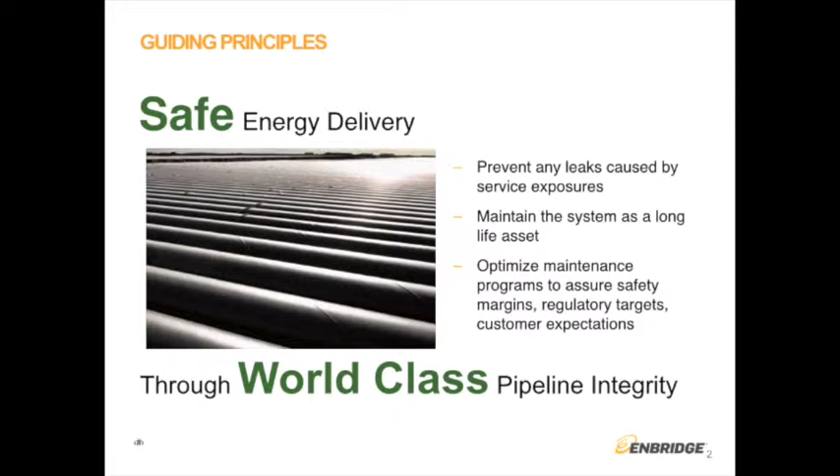What we do is monitor them all the time, and we repair as needed. At some point, we determine end of life, basically because the cost of repairing is too much, and it's easier to replace than repair. But effectively, there is no end of life. And we want to work with all the different stakeholders, regulators, public, industry partners, everyone else, to make sure we can optimize our programs and do what makes sense.

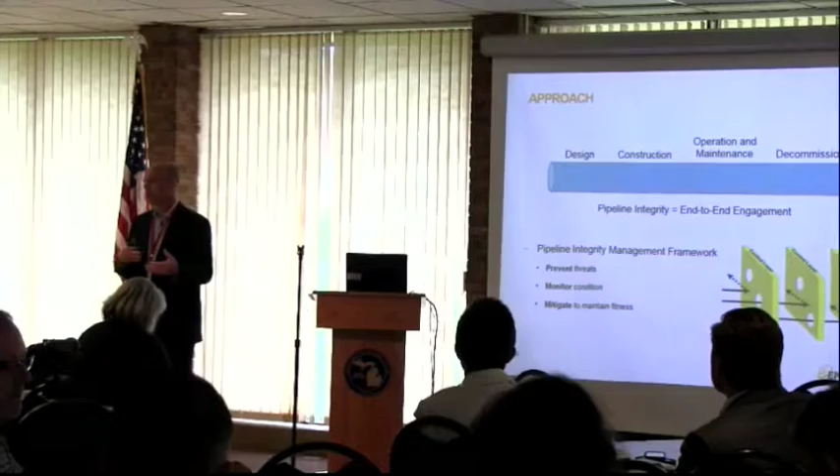Our approach, when I talk about tools, I'm talking about a very holistic approach. Pipeline integrity doesn't start once we start shipping oil. It starts well before that, during the design and concept selection. There's lots we do right at that point to make sure we're designing a safe pipeline. During construction, there are many things we do to ensure the pipeline will be constructed and able to be maintained safely. All through operations, there's again many different things we do, and certainly into decommissioning as well.

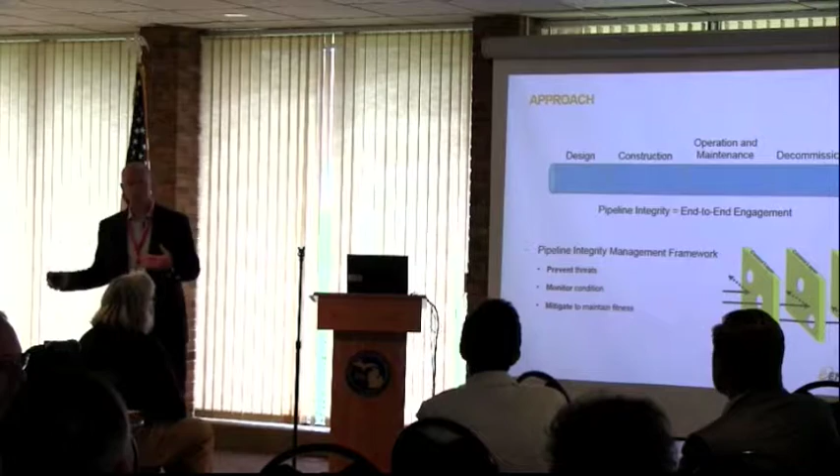So that's one thing I want to leave with you: it's not just during operation. It's well before that and well after that.

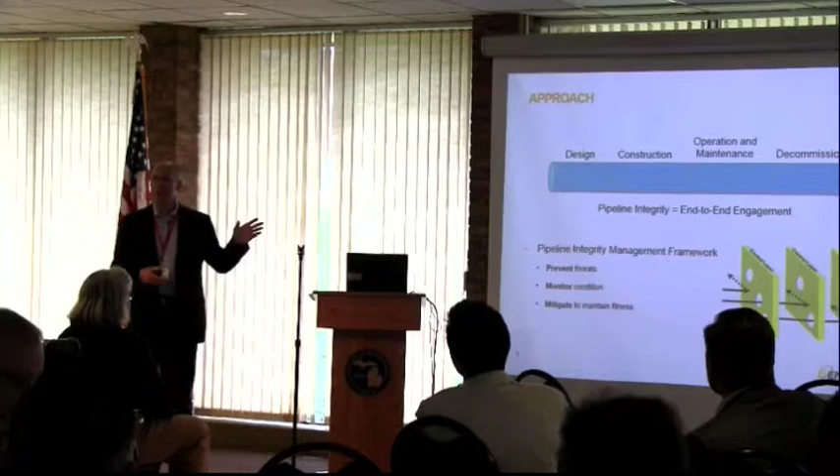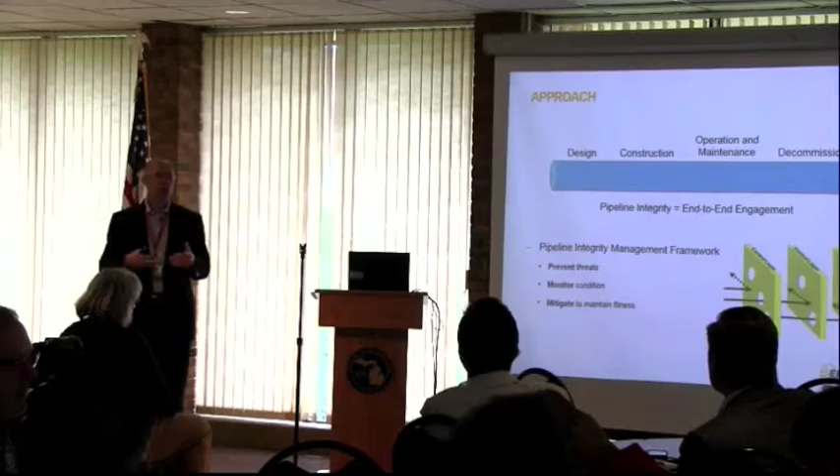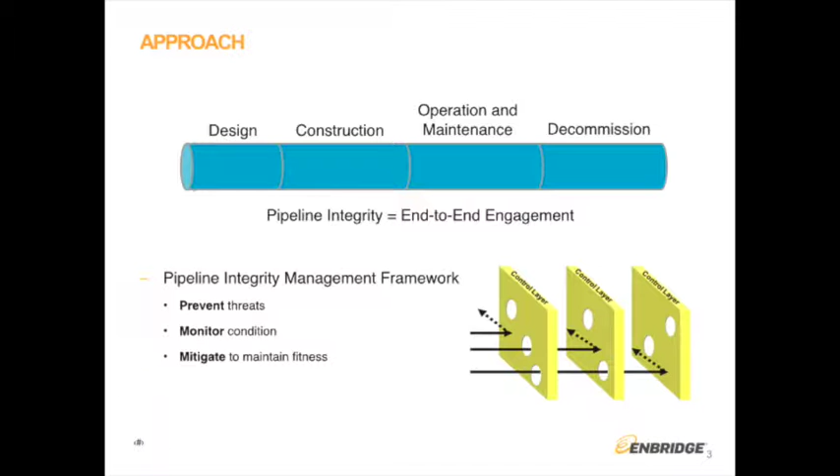Another concept I want to leave with you, and people in the chemical industry will be familiar with this, is the concept of multi-layer defense. We don't rely on any one thing to keep us safe. We try to have many different layers of defense. It's a well-known model, James Reason's Swiss cheese model. If you only rely on one layer, no layer is perfect, so something might slip through. But the more layers you add, the more chance some of these layers will catch whatever problem is coming up. So one theme you'll see through this is that there are many different layers of defense we utilize to keep our pipeline safe.

In very general terms, we talk about preventing any threats. We want to monitor the condition of our pipelines, and then we respond and mitigate anything that goes wrong.

In terms of prevention, on the left-hand side, there are four basic threats that we're trying to measure and monitor, and then there's a bunch of prevention measures. Even within these measures, there are many different tools. If I were to give you a list of all the tools, there's maybe 50 or 70 tools that we use, across a whole suite of different things.

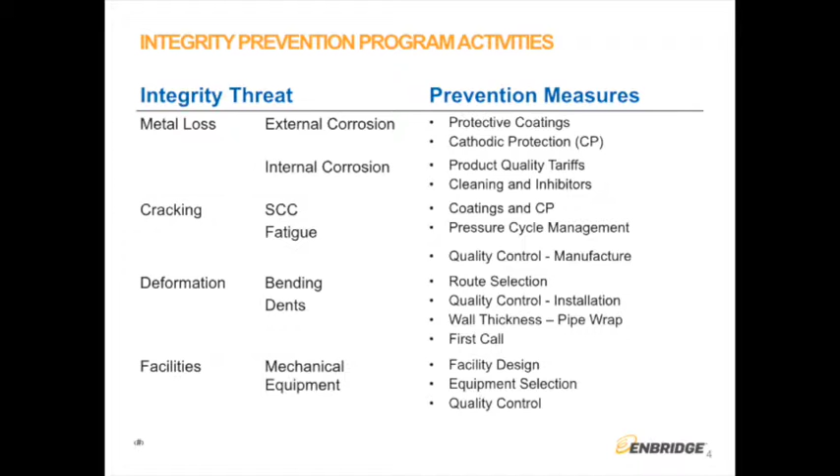But at the basic level, integrity threats, if there's a leak, it's typically happening for one of four threats. It's metal loss, which is typically corrosion. There's cracking, and deformation, which is typically third-party damage, something hitting our pipe. Or in our facilities, we have lots of different equipment like seal leaks and stuff like this that we're trying to monitor.

In terms of diagnosing, we use a full suite of tools. Some are very scientific and detailed, like the inline inspection tools, and I'll go into a few examples of that. Some are as simple as doing visual inspections of different pumps and pieces of equipment. There are online sensors which measure strain and stress. We do cathodic protection. Hydro testing is appropriate in some situations, and in others, non-destructive examination. There's just a whole suite of tools that we use.

Particular to the straits and water body crossings, there are lots of surveys that we do. We use remote underwater vehicles to take pictures. There's GPS, and there's ultrasonic testing.

Basically, a lot of computer stuff built into a pig that goes inside the line. The oil pushes it along. We measure a bunch of stuff, and I'll go into the details here a little more. And it comes out, and we analyze the data at the end.

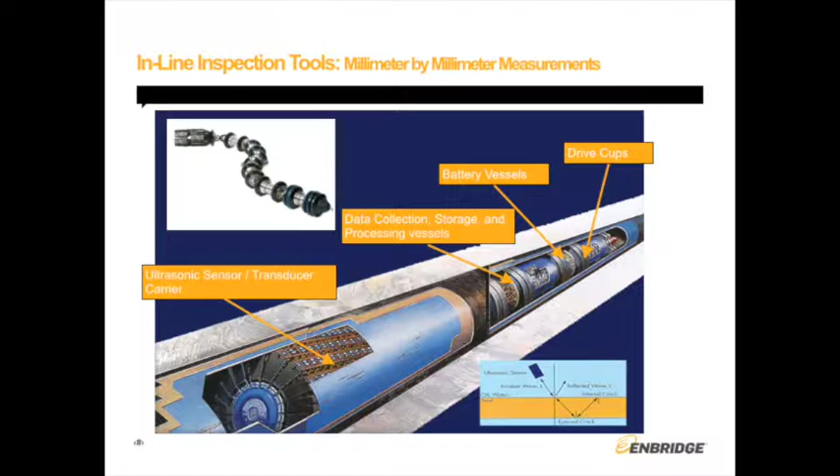Typically, these things are fairly standard. There's always some drive cups which allow the oil or the fluid to push it along. There's always batteries, there's always some electronics and some computer memory cards, and then there's the actual instrumentation. There's a bunch of different varieties of instrumentation we can do, and they all have some strengths and some weaknesses. So again, we use multiple versions of these tools that provide that overlap of systems to keep us safe.

This is sort of state-of-the-art science. This is the best technology that's out in the world. And this is the same stuff that's used in hospitals. So we talk about UT tools - UT is ultrasonic testing. UT is the same as an ultrasound in a hospital when you're getting examined, whether you're pregnant or whether you've got some sort of condition that needs an ultrasound.

We talk about magnetic flux, MFL tools, magnetic flux leakage tools. That's the same as an MRI tool in a hospital - we're using the same technology. We talk about non-destructive testing, often that's X-ray, again same thing as a hospital.

We're looking at the pipeline on a millimeter by millimeter basis. We're looking for any little thing that's out there. And so you can imagine, we've got about 16,000 miles of pipeline, and we're looking at every millimeter. We're finding lots of stuff. There's a tremendous amount of data.

And we analyze all that data, and we use algorithms and computers, and we use probably thousands of people that are analyzing this stuff all year long. And we're looking for those small little defects that might only be 2 millimeters wide and long and deep. And we need to understand what those look like and if they pose a threat to our pipeline or not.

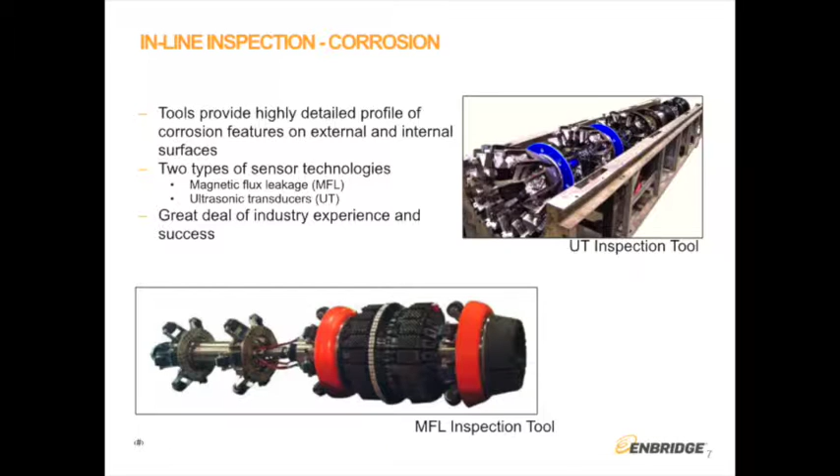In particular, this is about corrosion. Corrosion tools have been around for a long, long time. We understand them very, very well. We understand where they perform very, very well. Lots of good experience - this is some typical output from corrosion.

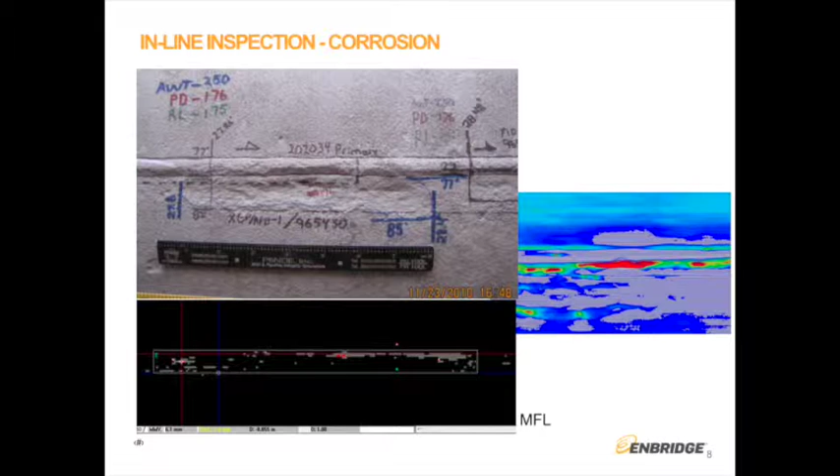This picture here on the right is just another sort of graphical depiction of that. Again, it depicts how much metal loss is there and where do you have to look and how detailed you go. When we get to the point where we actually make the call that we have to go look at something, this is the actual piece of pipe. So we went out there, we excavated it, we identified a flaw, and we wanted to understand more about it, so we cleaned it up.

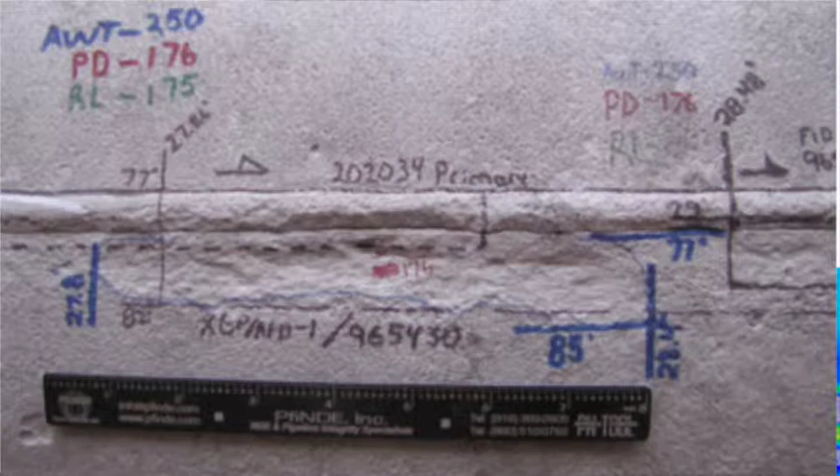This part here is the actual corrosion. You can see, I'm not sure how good you can see from the back, but we do the non-destructive testing. We measure how deep it is, how wide it is, how long it is. We do the calculations to say, is this a problem for us or not, what do we have to do, and then we do whatever repair we need to do to make it safe.

Often that involves putting a whole new metal sleeve around the pipe to keep it safe. But anything that is a remote concern to us, we'll dig up and we'll analyze physically, and we'll figure out what we need to do to keep it safe.

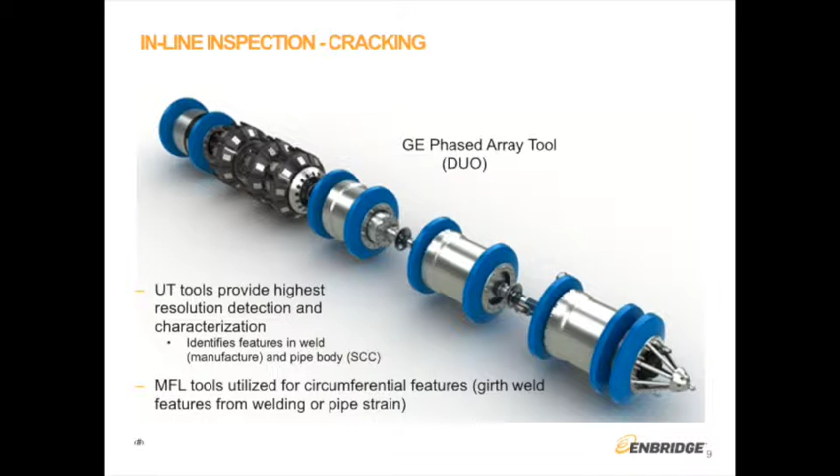This is the cracking tool. Again, uses the same sort of technology in a different tool - ultrasonic testing, MFL tools, magnetic flux tools. This is one where it's got both built in. It's by GE. We have a number of different companies that we use to manufacture these tools and run these tools for us and do the data analysis. GE is one of them.

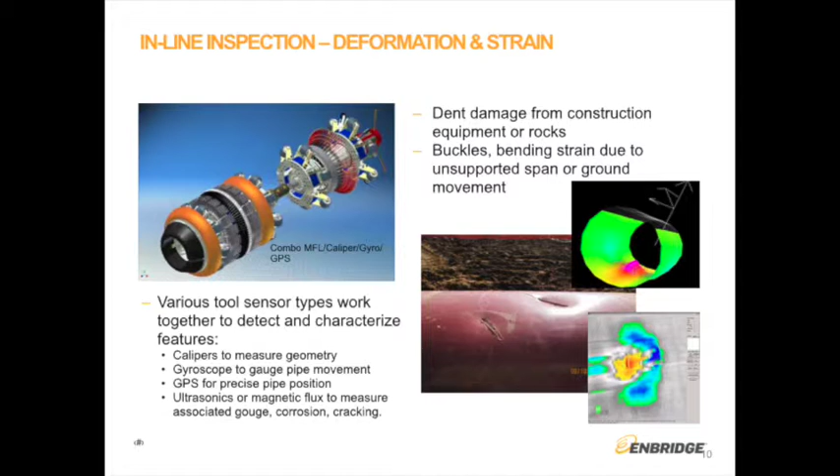This is a deformation and strain tool. This is a geopig. It uses GPS, so we track exactly where the pig is at any one time. We can use that to locate whatever it finds. This tool is really used for identifying things like gouges, dents, or buckles. Again, samples of output characterize any areas of concern, which we'll go analyze. Gyroscopes are in here, GPS, ultrasonics. Again, lots of science goes into these things.

The last tool I want to talk about is a relatively new one, and this is really one of the learnings. Someone asked what have you learned from Marshall. This is one of the things we've learned. And again, I go back to that whole concept of defense in layers.

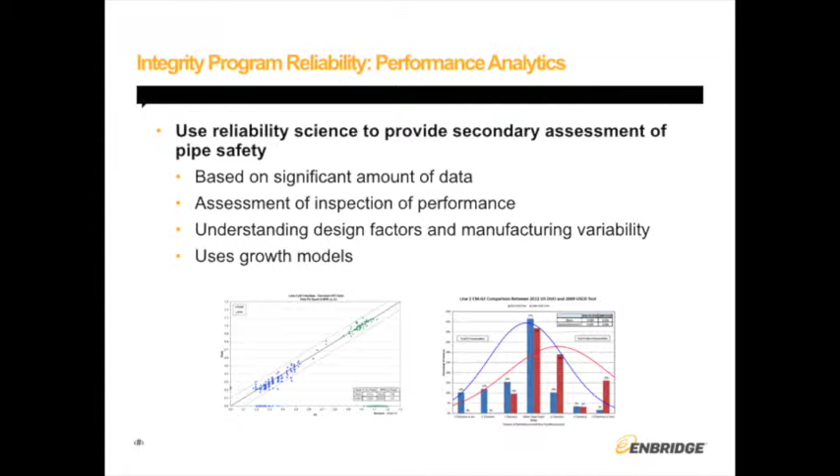This is a secondary analysis that we do, a new layer of defense that we put on it. Since Marshall, we've spent roughly $4 billion, probably more, just on integrity. That represents a massive increase in integrity spend. As part of that, we've analyzed tens of thousands of locations. When we analyze it, we do these scientific runs, we run the ILI tools down, they give us an indication somewhere, and we go dig that indication. And we compare the indication, the real found data in the hole, to the ILI data.

What we want to see is a high correlation. We want to see them matching up. What that tells us is that our tools are really good at finding exactly what's out there.

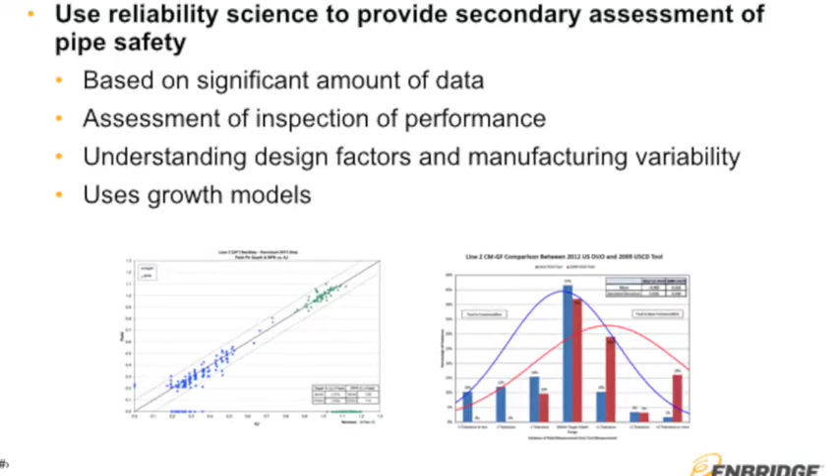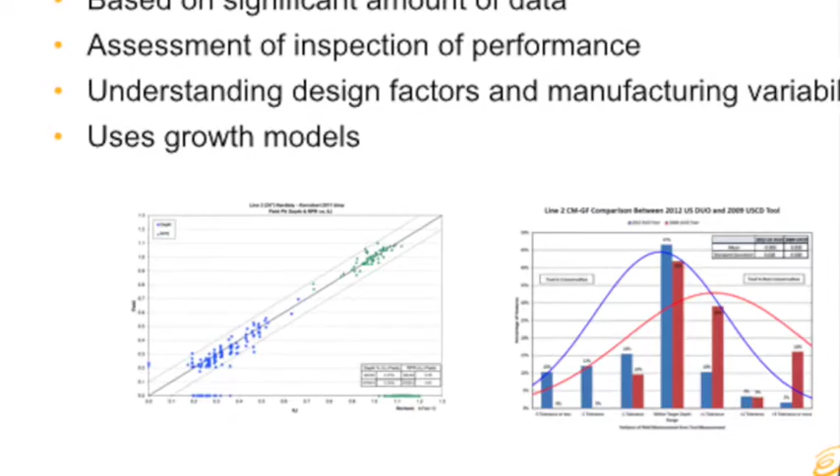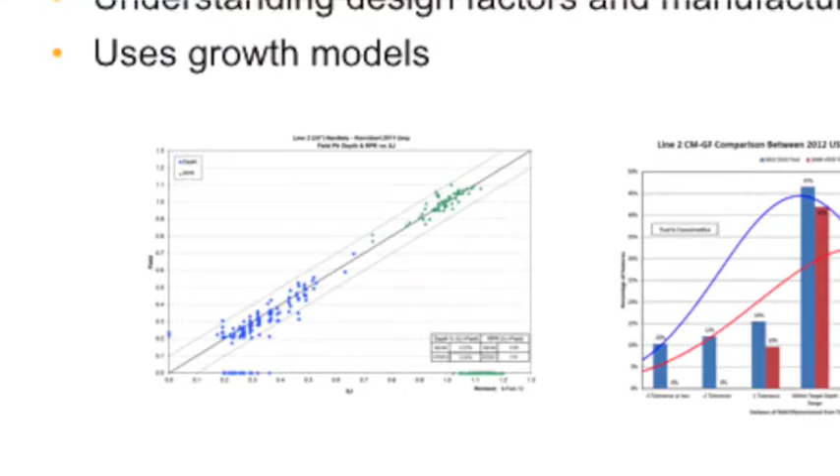That's what this chart is showing. This chart is called a unity plot, pretty common in integrity discussions. On the bottom axis, this is what the ILI tool told us, what it identified as the defect. This vertical axis is what we actually found in the field. This line going on a diagonal is called the unity line. We want everything bang on that line. That would be ideal, but it doesn't always happen as ideal in the real world. So we want everything as close as we can to this unity line as possible.

When we've got this much data, 10,000 parts or pieces of data or more, we can start doing advanced analytics on it. It's really about statistical modeling. We can say if everything correlates really well, we're really confident in that tool. If things don't correlate well, we know we have to do more work.

Some of the things we do if we aren't confident in our tools is hydro testing. We're testing right now on line 2. That's really because we weren't getting the clarity on the tools that we wanted to see. So we said, we can't rely on them 100%, we're going to go test this line. This is really a brand new thing. Enbridge is one of the only companies doing this. There's no codes and regulations that say you have to do this, but this is an added layer of defense that we're doing to make sure our lines can be kept safe.

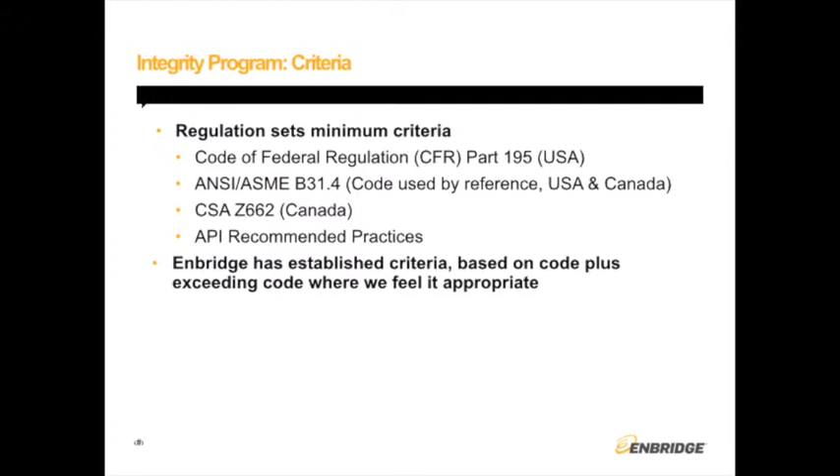In terms of criteria, there's a bunch of codes and standards that set out the minimum criteria defining when we need to dig and what we need to identify as a flaw. They're set out by CFR. In Canada, it's CSA Z662. API's got a bunch of recommended practices referenced in code, which we also follow. But we don't just go for minimum. We will analyze all those things and certainly meet the minimum, but in certain cases, we want to go beyond that. So we've got our own standards that we want to adhere to as well.

So really, in summary, we are committed to zero leaks, and I don't use that word lightly. We spent $4 billion. We've increased our team from probably about 30 people to 180 people in pipeline integrity since Marshall. We have new VPs, new directors for integrity. It's been a massive commitment over the last 4 years, and we are committed to keeping the pipeline safe.

Again, we look at this from a long life critical infrastructure asset approach. We want to keep every pipeline equally safe. Some require a bit more work than others to keep safe. Some were inherently designed, or rather the construction and manufacturing processes were better in the day, so they're easier to maintain. Some take more resources to maintain. That's life. We want to keep them all safe.

I'm at the end of my time, but again, I just want to emphasize that we appreciate forums like this because we want to work together and collaborate with everyone, whether it's PHMSA, the Coast Guard, EPA, the NGOs, or the rest of industry. We're all in this together. Thank you very much.